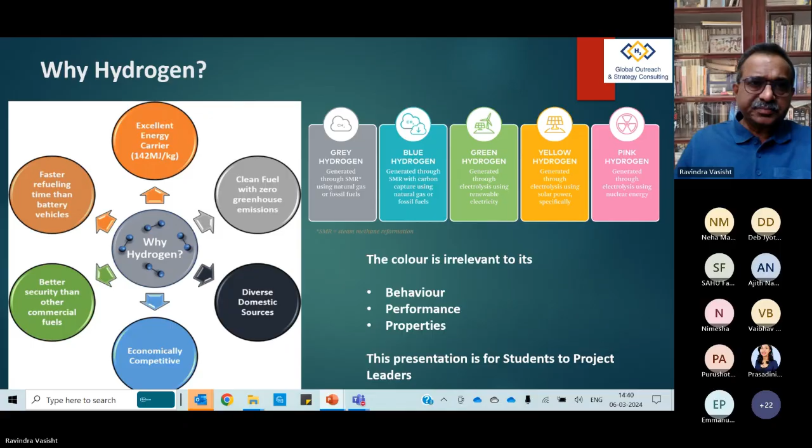To give a very slight historical background and key info about this, hydrogen is not something that is new. It's been there since the 17th century. So we are literally talking about more than 4 centuries since its knowledge and usage in the industry for various scientific activities.

It exists in abundance, as I said. The key is that it requires power to produce, which means one needs to look at an energy versus power balance for this. And compared to other definitions, one key definition which especially the Americans have followed is whether there's any carbon produced in the process of producing hydrogen.

And I think India is also probably including that as a part of the definition. Which means that it is not just solar or wind or hydropower that comes in as a renewable energy, but nuclear also can be an input source which can change the entire dynamics of this particular industry.

Safety is a very key important factor, especially when handling this. And above all, one needs to understand that hydrogen is an industry that is happening simultaneously across the globe. Whether it is a smaller country or a large developed country, both of them are talking of hydrogen at the same time.

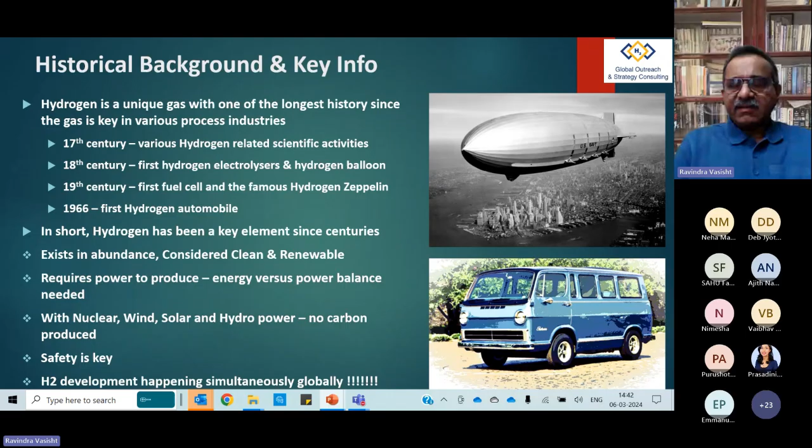Unlike earlier, where one would wait, like India would wait for a while before something is proved and understood in, let's say, US and Europe and such places. So India would have the benefit of the learning from others. But this time, including India, everyone is talking of hydrogen at the same time.

So as I was mentioning earlier, when you look at the energy content and when you look at diesel, which is somewhere around 45.3, you have hydrogen at 142, which is almost 3 times that of diesel in terms of the energy that it gives you.

But on the other hand, when you look at the density, which is what is important for storage, you will find that the graph is exactly a mirror image, where you can store diesel in very large quantities in a given space, whereas hydrogen is hardly 5% or less than 5% of what diesel could do for you. So which means that you have a very wide bandwidth of what the gas can do. And that is where the first contrarian behavior of hydrogen and its challenges start.

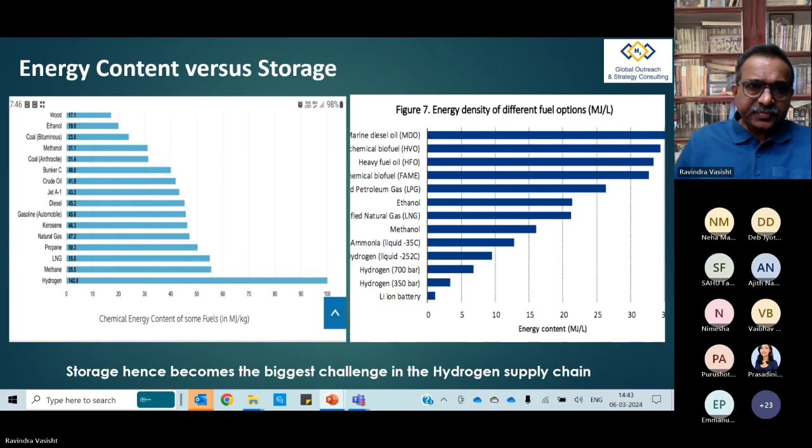After a long time, I debated and then decided I would jump to something which I wanted to have in the end. And I'll tell you the reason why.

Now, when you look at the various standards in India, or for that matter in the world, it is an extremely important factor when you're doing anything in the hydrogen sphere. What you find is that globally these standards are evolving, they are changing and they're improving. As a consequence, along with things like periodic retesting and other certifications, there are various other minor points which add to the complexity and cost of what a nation outside of the US and Europe ends up doing in hydrogen.

One of the factors is, for example, when you take the mobility application, whether it's a train, bus, truck or car, you have different standards, and the design factor for these is between 2.25 to 2.5, or actually 2.4 to be more precise. But when it comes to storage and transportation, apart from the fact that some standards have 2.25 to 2.5, there are others where the design factor is 3.

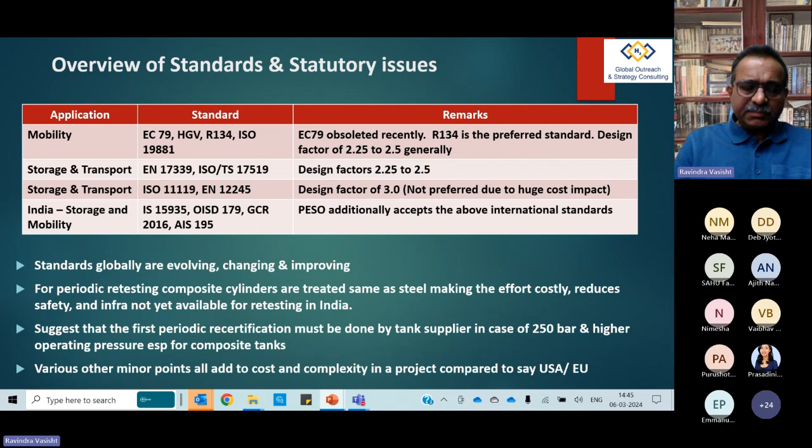Now let's look at the way the industry is working currently. When you look at the mobility sector, meaning transportation whether by train, bus, truck or whatever, normally they use either a 350 bar or 700 bar storage tank currently, and these tanks are designed with a safety factor of between 2.25 to 2.4. When it comes to storage and transportation, these vary from as low as 200 bar right up to 950 bar, and the design safety factors vary between 2.25 up to 3.

So where do these things make a difference? Suppose one were looking at a composite cylinder, and I'll come to composite cylinders in a minute, and you're using carbon fiber, then a safety factor as low as 2.36 is allowed. Whereas you can also make the same cylinder using glass fiber, where the requirement of safety is 3.

Now, what exactly does this mean? It means that if you have an operating pressure of 250 bar, then your design pressure would be either 590 bar or 750 bar, depending on what safety factor you need to follow based on the standards you take. As I mentioned in the previous slide, there are certain standards which demand a safety factor of 3, where even for carbon fiber they make it mandatory to have a safety factor of 3. So if you take an operating pressure of 350, you need to go up to as much as 1050 bar. And for a 500 bar cylinder, you need to design it for actually 1500 bar.

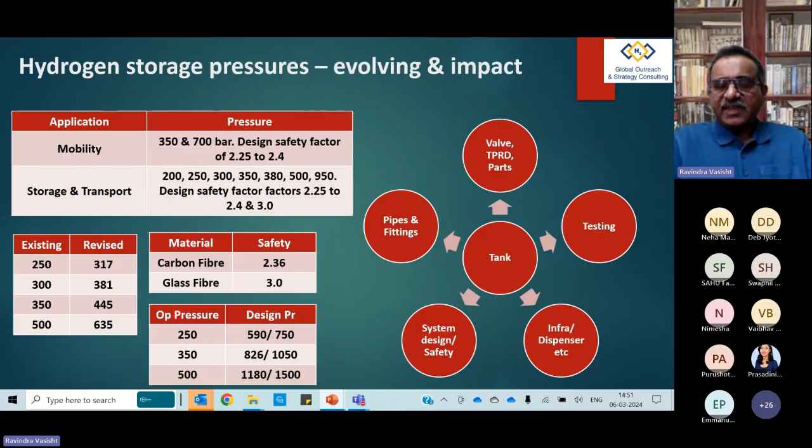Now when you look at applications, these are some of the broad applications you have. If you take a Toyota Mirai car, it operated at 700 bar with 3 cylinders. You have buses and trucks which run at 350 or 700, and trains.

And when you need to transport hydrogen, you can have a hydrogen train, as you could see at the bottom left-hand side. And when you look at the inside of it, what you see on the right side is how you would look at it.

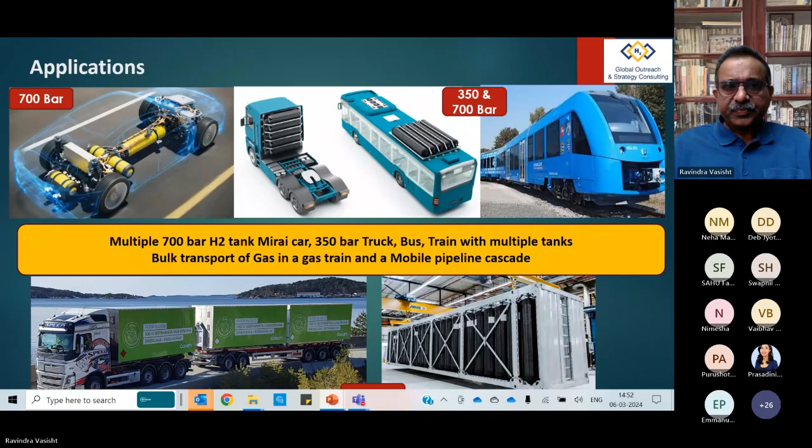So now let's look at the hydrogen delivery chain, what exactly happens. You have an electrolyzer where hydrogen is produced at maybe around less than 30 bar. Then you have a compressor which will compress it to either maybe 200, 350, or 500, or it could be liquid hydrogen, and you store it because you need to store the hydrogen you produce.

Assuming you're using the hydrogen in the same location, you would again reduce the pressure back and use it either in a fuel cell or in a process, where again the pressure requirement is less than around 20 bar normally.

Now suppose you decide to transport the gas from the production site to a consumption site, you would compress it to around 250 or 500 bar, take it in a truck, and at the location where you're going to use it, again reduce the pressure and then use it.

On the other hand, you could have a situation where you need to fill it up into a truck or a bus, which means that because the pressure reduces, you need to again compress it, take it into a dispenser, and then dispense it into a truck or a bus.

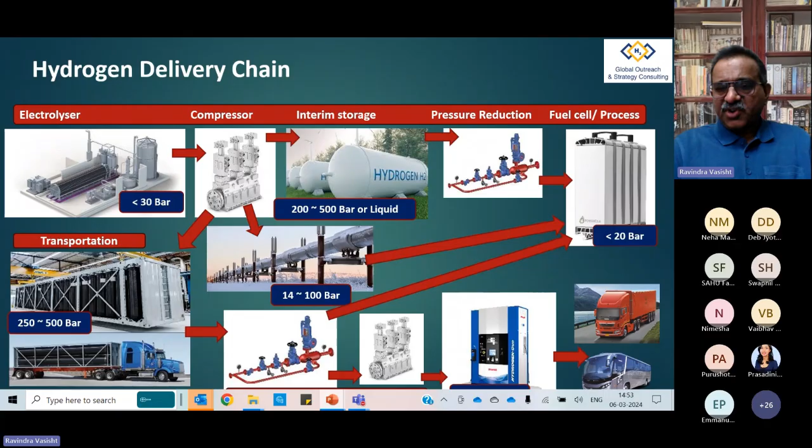Now what is the implication of this? It's the energy chain. In the energy chain, you have energy to produce hydrogen, then you use energy to compress the hydrogen, then you need energy to maintain that storage depending upon whatever storage you're going to use, and then you're going to use that energy in the process.

On the other hand, after compression, you might again expend energy to transport the hydrogen, and then at the delivery location, you will have energy to maintain the storage, and then you will need energy to dispense the hydrogen, which could be used either in automobiles or in a process.

And then if you are delivering it to a vehicle, the pressure reduces, which means you again need energy to compress the hydrogen and take it back. So the entire chain uses a significant amount of energy. The lesson from this is that it is important to map the energy chain across the whole chain so that you can balance the energy and not have a situation where you are spending more energy but generating or utilizing it with lesser benefits.

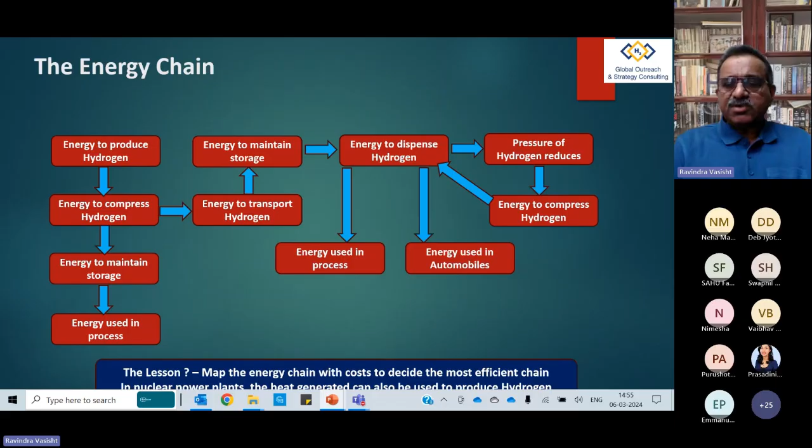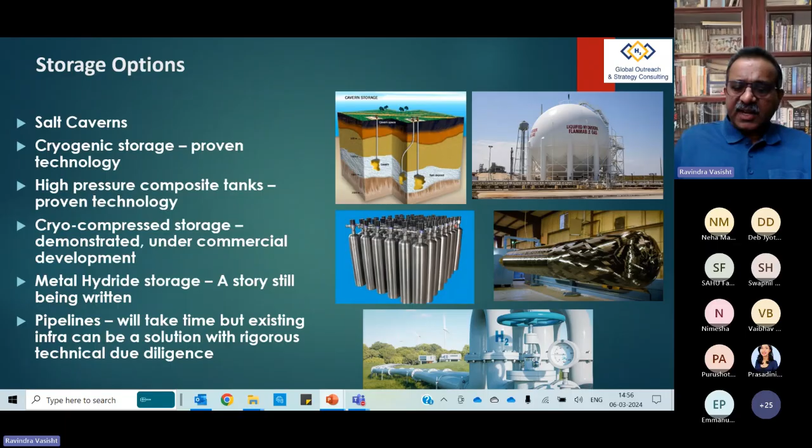So let's come to salt caverns. Salt caverns are essentially an artificial cavity created in a geological salt deposit, which is deep underground. You drill into that location, pump in water to dissolve the salt located deep underground, remove that, and then create space as you can see in these photographs. And then you push hydrogen into these caverns so that it is stored in large quantities, as much as around 200 bar, because you have dug deep into the ground and you automatically get that pressure containment.

These have normally been used where there is an existing pipeline and where they want a fallback in an emergency when they need to repair the pipeline or some such reason. So this is where it is being used. And while these are safe and long lasting, in the entire world right now there are just about 4 such locations. So availability of such a location is important for you to be able to even use this kind of a solution.

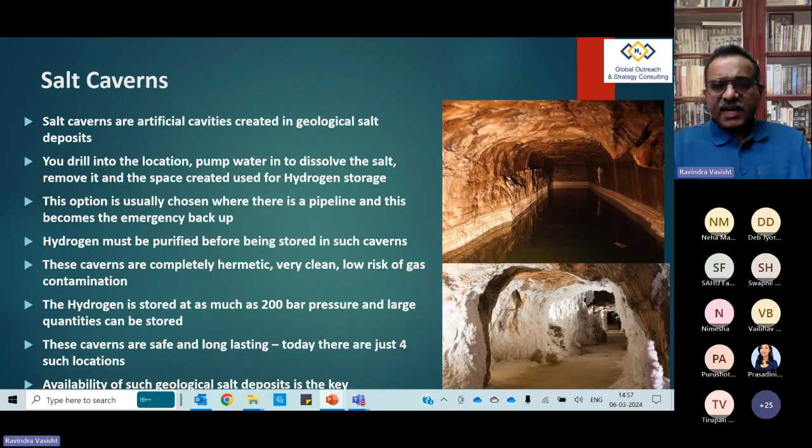Now let's come to cryogenic storage. This is again proven technology, where the hydrogen is stored in liquid form. This technology is already being used globally in quite a few places. Now, when you look at the different gases currently used in the field in liquid form, natural gas is at about minus 161 degrees centigrade, nitrogen at minus 196, and hydrogen is actually at minus 253.

So you can imagine the level of cryogenic temperature you need to reach to convert it into liquid and then store it by maintaining that temperature. So today, when you look at LNG globally, you do not see it very popularly in commercial applications like on a truck or a bus, even though there are a large number of them on the road. But when you compare it to CNG, compressed natural gas, these are probably hardly a few percentage compared to the compressed natural gas form.

Whereas LNG is essentially used for bulk shipping, to take LNG from the Gulf to the US, or maybe somewhere in the Gulf to India. Now, the energy required to liquefy is anywhere between 12 to 15 kilowatt hours per kg. So the total energy for liquefaction and to maintain it is pretty high, which means the economies of scale required for such a project is very high. Globally, from what I've understood from people, current storage capability is around 5 to 10 tons per day around the world.

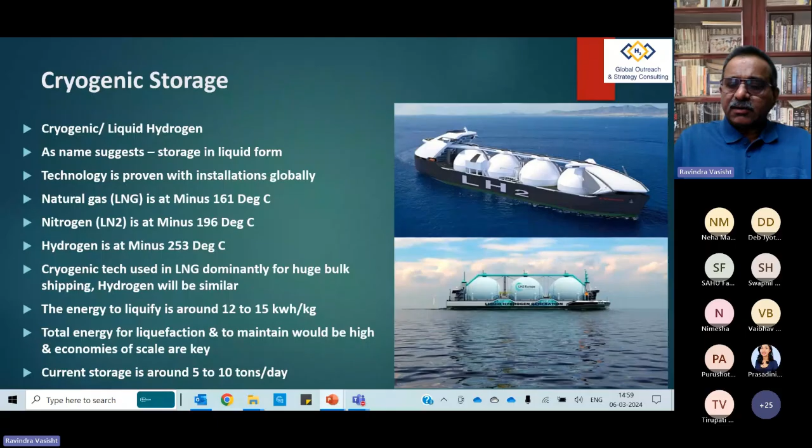Now, the other place where you would have heard about cryogenic liquid hydrogen, but without the word hydrogen being used, is the cryogenic rocket engine, which is what you would have read about every time ISRO launches a satellite using the GSLV rocket. These are all cryogenic rockets where hydrogen is stored at minus 253 degrees centigrade. It is mixed with oxygen, and then you get an extremely high thrust, something that no other fuel available and known to man can provide, which is the reason why they use this.

Now, this entire system is extremely complex, and the thermal and structural challenges for storing it at that kind of temperature are very high. So the safety factor and the safety systems and culture required are significantly higher compared to any other gas and any other normal systems we follow today.

Very interestingly, this particular technology is not only proven, but it is even manufactured in India. But yet, very few people, or nobody, really uses it because of the complexity, the cost, and the scale required. For example, someone like NASA has a tank of about 5,000 cubic meters. Now, they are talking of going up to 20,000 and 40,000, but do they have it as yet? No, they don't. So this particular technology is predominantly used in the aerospace and defense segment. So when you start looking at it at a commercial level, it has a whole host of challenges, which I will come to towards the end of my presentation.

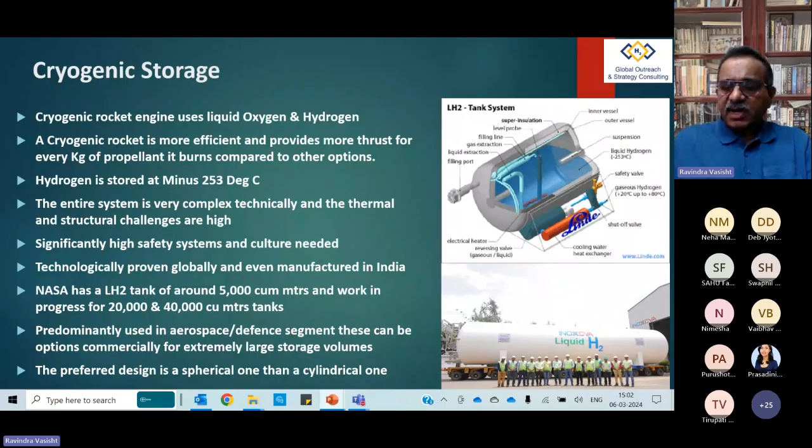Now, the third kind of storage is metal hydride. Essentially, there are certain metals and alloys which are capable of reversibly absorbing and releasing hydrogen. So when you want to store hydrogen, there is heat released and it absorbs the hydrogen into itself. And then when you want to use the hydrogen, there is heat that is absorbed and the hydrogen is released for you to use as a gas.

There are materials like lithium hydride and sodium borohydride and so on, which have been used. But then the IP is in these kinds of materials and the way the systems are designed. The biggest advantage here is that you can get significantly high storage efficiency at a very low pressure.

Now, this technology is yet to go commercial. It is still at a lab level application, as I would call it. We really do not have information about the costs and the supply chain issues. And the entire system has a number of unstable challenges, because of which the US, for example, which is probably the benchmark in the world for safety systems, has suggested many safety safeguards for its usage. But does this storage system sound exciting? The answer is yes.

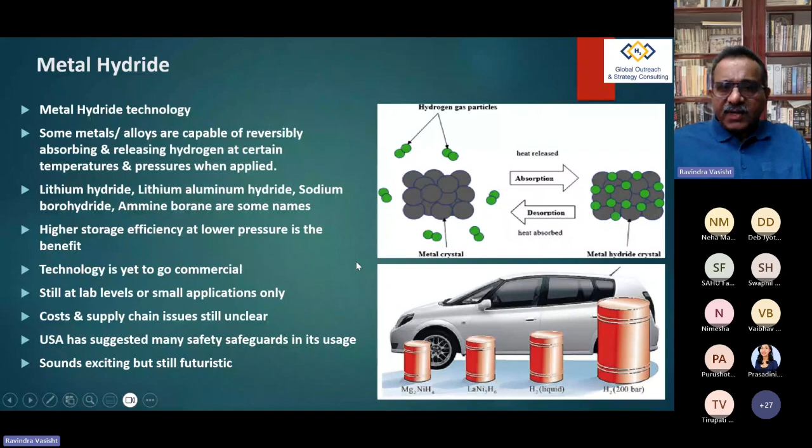So when you look at, for example, in a car, if you were wanting to use metal hydride or hydride kind of storage, the size of a tank would be, depending upon the material you're using, like what you see in the first and second ones here. If you were to use liquid hydrogen in the same car, this is the third one. But if you were to use hydrogen as a compressed gas, as much as 200 bar, as low as 200 bar, this is how large the tank would be compared to the size of a car.

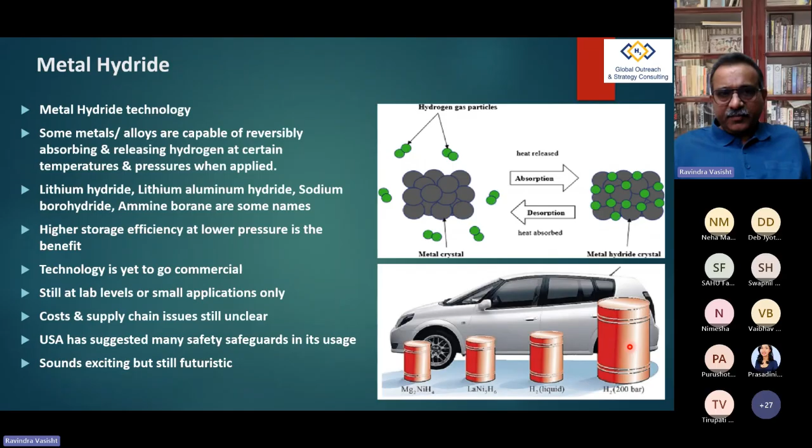But yet, 100% of the cars in the world today use compressed hydrogen gas and not any other form of hydrogen. Now, the next technology, which has been demonstrated but is expected to be commercially available by 2025 hopefully, is a hybrid technology where cryogenic temperatures and high pressures are combined, where the gas is cooled and stored at 400 bar pressure.

Again, composite cylinders are used, but these composite cylinders are designed to be able to handle cryogenic temperatures. Now, the technology, as claimed by way of the demonstration, can have 40% higher volume compared to a 700 bar system available in the world today. And the station cost, meaning a dispensing station where you would refill your truck or bus with hydrogen, is supposed to be 25% of setting up a 700 bar system in terms of total cost of ownership.

Now, when you look at what this can do, a truck can have something like 100 kgs of hydrogen storage with one of these kinds of systems you see. The one on the top right with 4 tanks will probably have 25 kgs each, giving you about 100 kgs total. The one on the top left will give you around 50 kgs, and the one on the bottom, for transporting hydrogen from point A to point B, could carry as much as 2,500 kgs of hydrogen. Today, a truck is not able to carry more than around 30, 33 kgs of hydrogen at 350 bar.

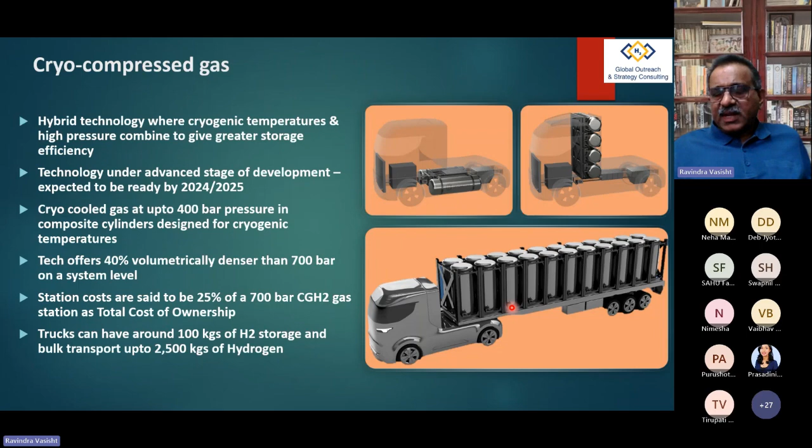And maybe around 50, 52, 55 kgs of hydrogen at 700 bar. And when you look at bulk transportation, even at 500 bar, you are not able to carry more than around 1.1 tons of hydrogen today.

So the storage solution today, that I would call 99% used across the world, is high pressure storage using composites. So I'm going to spend a lot more time talking about this particular kind of storage.

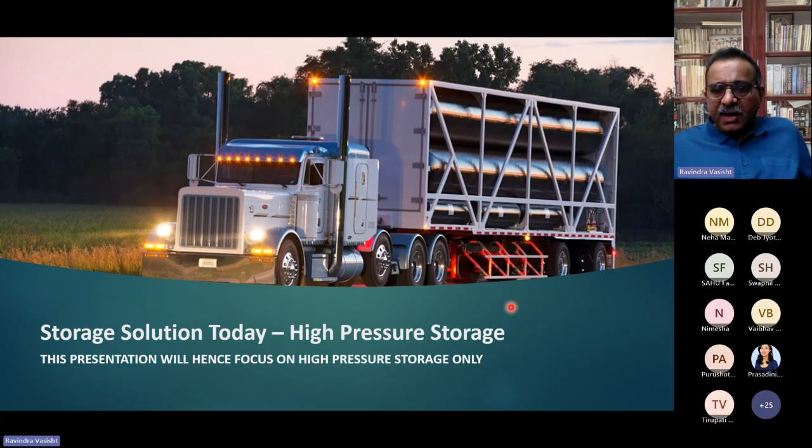Now, there are different kinds of cylinders available in the world today, classified as type 1, 2, 3, and 4. Type 1 is essentially what we all know, a steel cylinder. Type 2 is an intermediate solution, a technology that came in to try to reduce the weight of the steel cylinder, but nobody in the world really uses it, and the only place you can possibly see it is probably China. Otherwise, nobody in the world would touch it. The third is type 3, a carbon composite cylinder with an aluminum liner, and type 4, which is again a carbon composite, but with a plastic liner.

So I will come to this in a minute now.

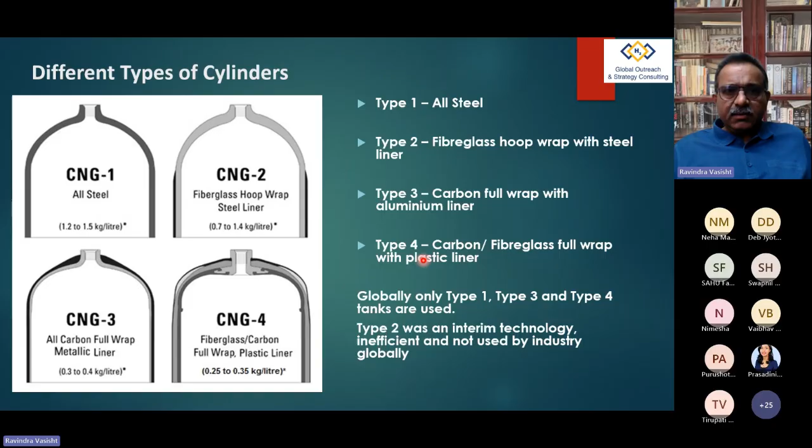So when you look at steel cylinders, what are the problems? One, they're extremely heavy. They are the oldest, and they very easily corrode and rust. Especially if you're in a coastal area, or a country like Sri Lanka which has a very large coastline where almost every city is adjacent to the sea, these cylinders corrode so quickly that in the Gulf area, for example, I've seen these cylinders get replaced every 5 years, because that's how quickly it corrodes and becomes unsafe for usage.

Now, when you talk about hydrogen, you have a significant problem of metal embrittlement, where as the pressure increases, the hydrogen starts weakening the steel cylinder itself, making it embrittled, where it can easily give way and create a safety problem for you.

So today, including in India, nobody uses a steel cylinder for more than around 170 to 200 bar storage pressure. There are special grades that can be used for up to 500 bar. They have been proven, they are in the market, but they are quite expensive.

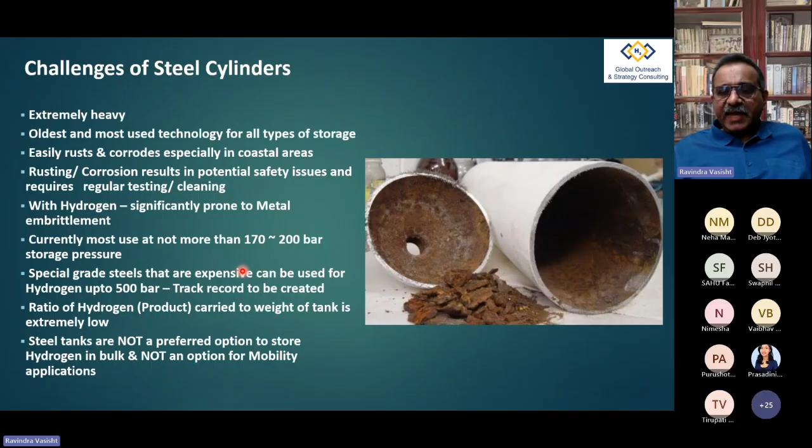And because these tanks are so heavy, the amount of product carried is insignificantly low. So today, as we speak, steel tanks are not an option at all to store hydrogen by anybody, especially in bulk, and especially in mobility applications on any kind of vehicle. So the option that people use is composites. Now, with composites, you can actually go all the way up to 950 bar storage pressure.

This technology has its roots and foundation in the defense and aerospace segment, which uses carbon fiber.

It would be technically possible today that a 250 bar system may be more cost effective than a 500 bar system. When you start looking at the system cost, the compressor and the composite tank for a 500 bar system could have the compressor almost 3 times more expensive than a 250 bar, and the 500 bar tank would be more than 2 times expensive as a 250 bar system. So we need to find out the optimum cost by factoring in the cost of compression and doing a system cost analysis.

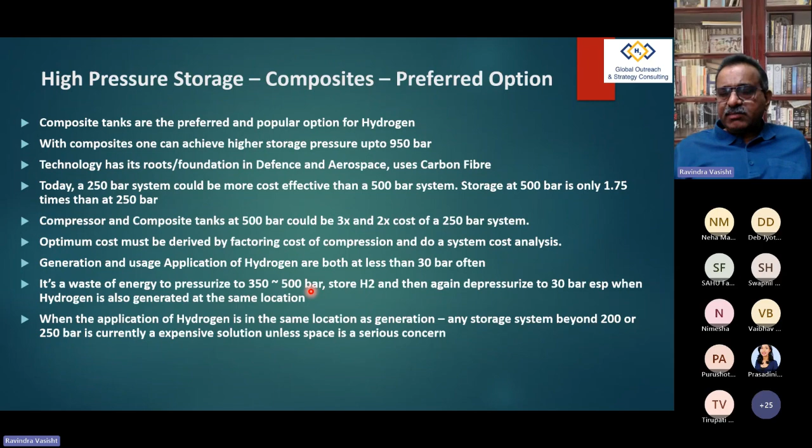As I said earlier, the generation and usage application of hydrogen, when it is less than 30 bar in a particular location, it is an absolute waste of energy to pressurize it to 350 or 500 and then depressurize it again to 30 bar, especially if it's in the same place. So if it is at the same location, as we speak today, a 250 bar or 200 bar storage could be probably more cost effective than any other solution.

So how does a composite tank look? A Type 3 or Type 4, as it is called, is the preferred choice for hydrogen storage applications, as also even for CNG. A Type 3 composite tank has an inner layer of aluminium, while a Type 4 composite tank has an inner layer of plastic. Up to 350 bar operating pressure, whether it is Type 3 or Type 4, globally it does not matter. Both are equally good and acceptable, and nobody would get into a debate between Type 3 and Type 4 when using it up to 350 bar operating pressure. A user must then focus only on price, delivery, service, and whether a particular size tank is available to suit their application, and that has to be the focus.

Now, when you start going beyond 350 bar and hitting 700 bar, especially for onboard applications, today a Type 4 cylinder is preferred because, to the best of my knowledge, a Type 3 is not available beyond around 450 bar. So a Type 4 is essentially preferred when using it at higher pressures. Going forward, composites are the only solution for hydrogen, at least in the next 5 to 10 years at the minimum. So, do not dilute the argument by getting into which technology between Type 3 and Type 4 — anything you go for would be equally good and acceptable.

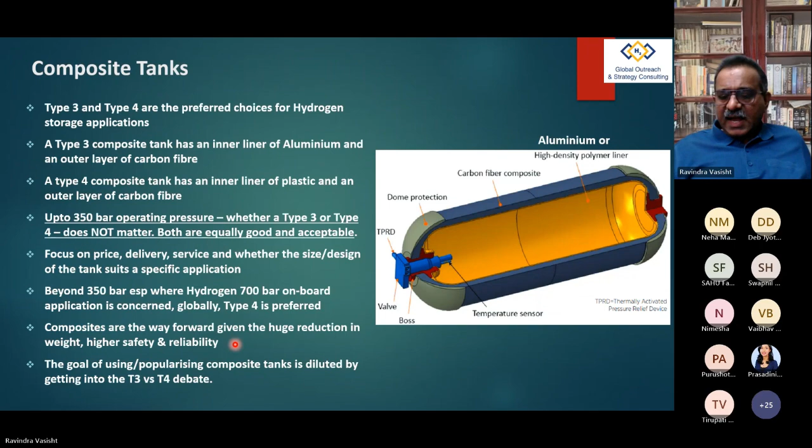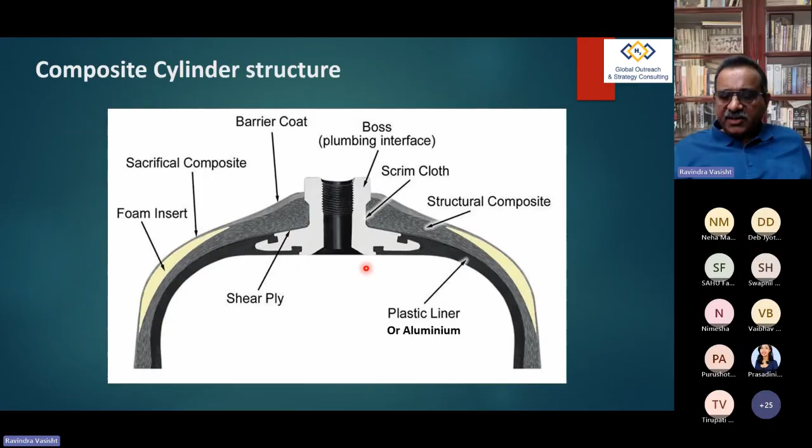So how does the structure essentially look? To give you a very basic understanding, you have a plastic or an aluminum liner, and then you have the carbon fiber wound around it. Then you have what's called an outer sacrificial layer, which gives it certain mechanical strength in case you suddenly drop it or accidentally hit it. Normally when this is being wound, the carbon fiber is wound in such a way that where the valve is fixed is completely hermetically sealed, so there cannot be any leakage in those joints. So the manufacturing process is like this.

When you take a Type 4 cylinder, for example, you have a long plastic pipe, which could be, let's say, 6 meters long. You can cut it to whatever length you want. Then you have these white portions on either side, which are injection molded domes, welded to either end, creating a cylindrical shape. In the case of aluminium, you would have an aluminium cylinder completely of this shape, since you're able to form aluminium into this kind of shape.

The main reason why Type 4 came in compared to Type 3 is that, for example, you take this pipe which is 6 meters long. Let's say you have a cylinder that is 3.5 meters long, and somebody tells you they don't want to change the diameter but want a cylinder that is 3.8 meters long instead. You just cut the pipe at whatever point you want, making it 3.8, do the same welding, and then you have a tank literally within 24 to 48 hours. So the speed of development with a Type 4 tank is very, very high, which is why Type 4 became fairly popular, especially where larger size tanks were being used.

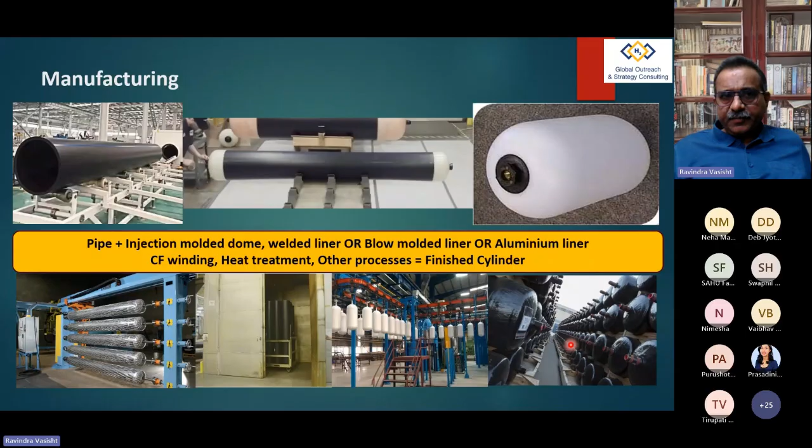So the benefits of a composite storage system: you have a 70% weight reduction compared to steel, which means a 100 kg steel cylinder, the equivalent of that in composite would weigh only 30 kgs. So you have two benefits that come from there.

One, you could, on a system, let's say a truck or a bus, technically speaking, have 3 cylinders of the same size instead of one for the same weight as steel, getting longer range or a larger quantity of gas that you would carry. Or if you're using just one, the 70% weight reduction results in fuel efficiency and lower carbon emissions. You have these kinds of benefits that come in.

There is zero corrosion. In a composite cylinder, there would be no corrosion because of any impurities that might be in the gas. It has a long fatigue life and very high impact strength. It is absolutely safe, and it meets standards that are more than those of steel in some cases.

This has been tested for a 30 year life cycle. It is assured for 20 years because that is what currently the statutory regulations allow. And these cylinders have been used at least since 1963, to the best of my knowledge, which means we are talking of more than 60 years of track record of composite cylinders in the market.

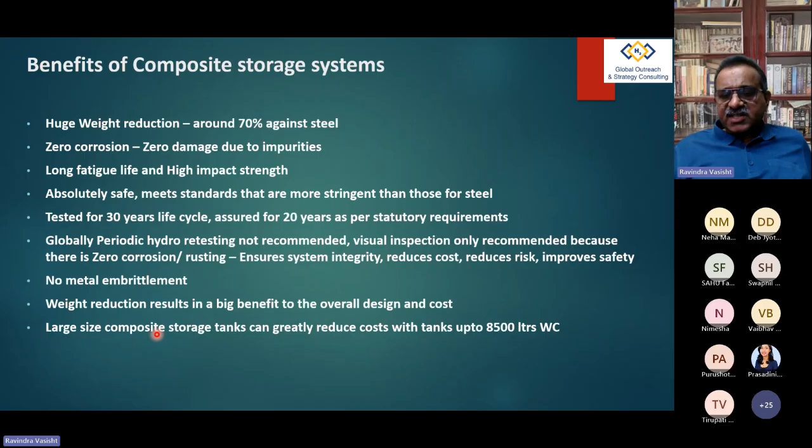So especially when you talk of type 4, you can go in for very, very large tanks of as large as 8,500 liters water capacity.

Now, to give you an idea of the next challenge when it comes to hydrogen, including in terms of storage, let us talk of 3,000 kgs of hydrogen to be stored. I've taken 3,000 kgs because of a particular customer requirement in India.

Now you could store it at 250 bar, 300 bar, 350, 450, 500. There are different manufacturers who offer different kinds of tanks. So I've done a kind of dipstick study with different tanks.

The first thing you must understand is at 250 bar, let's say you have a fill efficiency of 1, which means whatever you're storing is at 250 bar pressure. When you go to 300 bar, your pressure ratio increases to 1.2, and your fill efficiency is still at 1.2. But when you hit 350, while your pressure ratio has gone up by 1.4, meaning 250 to 350 increases 1.4, the amount of hydrogen you can store is only 1.3 times more.

With 450, it's 1.6. With 500, when the pressure ratio is doubled, one would normally assume you should have twice the amount of storage in the same tank. But you have only 1.7 times, which means the fill efficiency reduces in the case of hydrogen. So you have a challenge when you're talking of using different pressures.

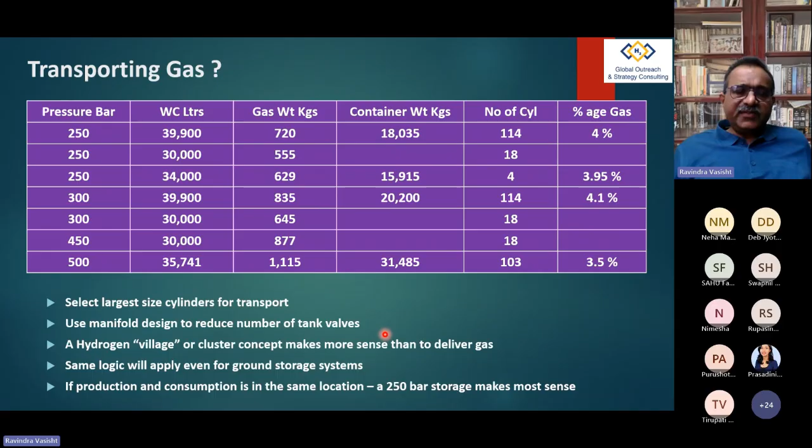And again, as I mentioned earlier, if production and consumption are in the same location, go for a lower pressure, at least as of today. If the prices change tomorrow, you can definitely go up to a higher pressure, which makes logical sense.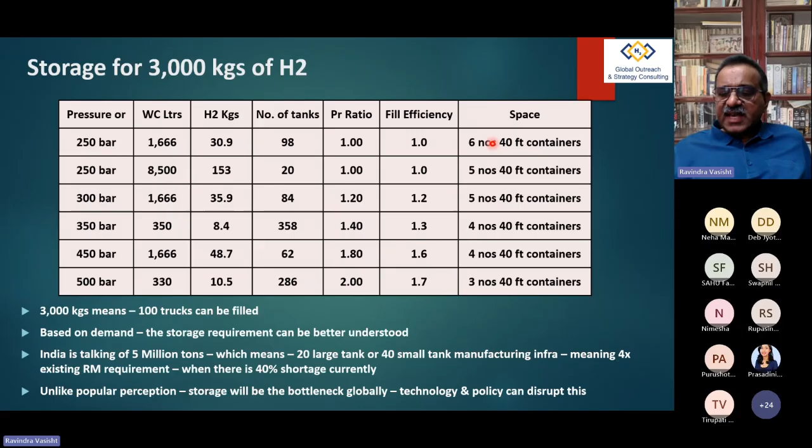In one such system, as I mentioned previously, you have anywhere between 3 to 6 numbers of 40 feet containers which have to move on a daily basis between two locations for you to be able to cater to just 100 trucks. So you can now start multiplying the number of trucks or buses that one is planning for, and then see how many trucks and containers will have to move to cater to their requirement of fuel.

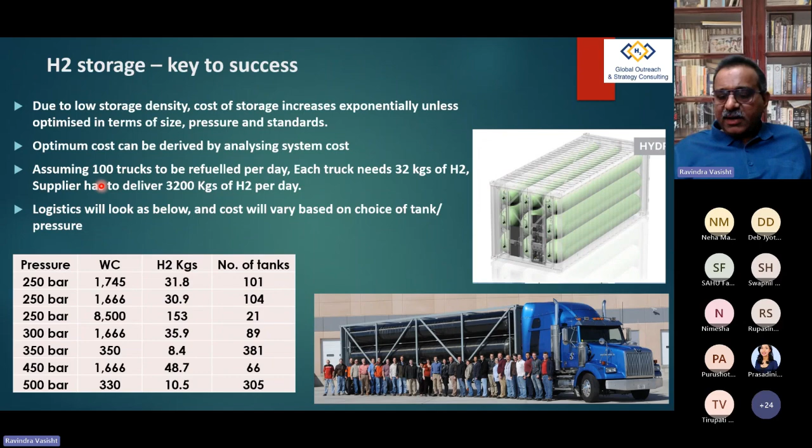So to sum up the hydrogen supply logistics, as I would recommend to anybody today, is that if you are producing hydrogen and utilizing it in the same location, look at an onsite storage of about 200 to 250 bar.

And then if you are dispensing it to vehicles, then you can have what I call distributed storage between 200 and 500 bar, so that your overall cost reduces and you have only a few cylinders at 500 bar. You use it by way of a differential pressure, and as the pressure reduces, you can keep using other cylinders of lower capacity, so that your overall storage cost reduces significantly.

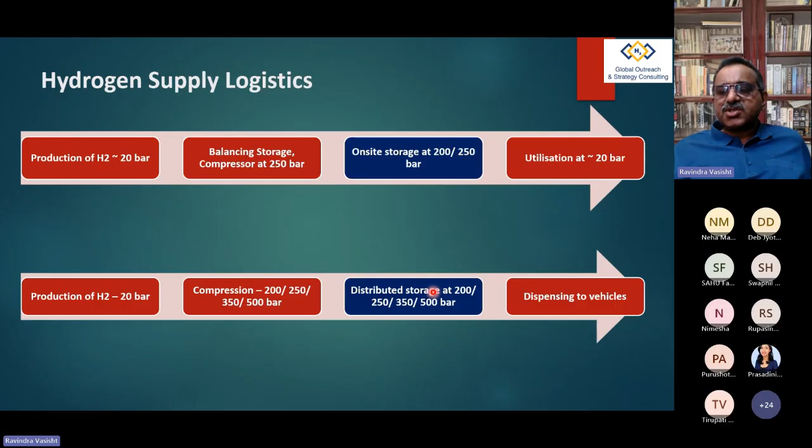Now, in the beginning of my presentation, I mentioned I would talk about some challenges. Let's take liquid hydrogen, for example. The entire technology, the sale, everything is driven by the defense and aerospace industry and companies like NASA or ISRO. Even an ISRO will not say 'I want it cheap,' because they cannot afford a 500 or 600 crore rocket and satellite to not work. Which means they drive what is required.

Very often, as happens in the defense industry especially, technologies then become commercial. So today there might be a technology that NASA or the European Space Agency is using, but that technology may not have been allowed by the governments to be given out commercially. So we don't know what we don't know in this factor. We only know what has been offered to us by a supplier who says 'I have a technology for liquid hydrogen,' and we accept that.

Now, there are huge product development costs, which means that while a NASA or ISRO would pay whatever money might be required, for a commercial enterprise that may not be possible. And then you have the cost of complexity, as I call it, because you need to handle this. So this entire technology being driven by defense and aerospace has all these kinds of challenges.

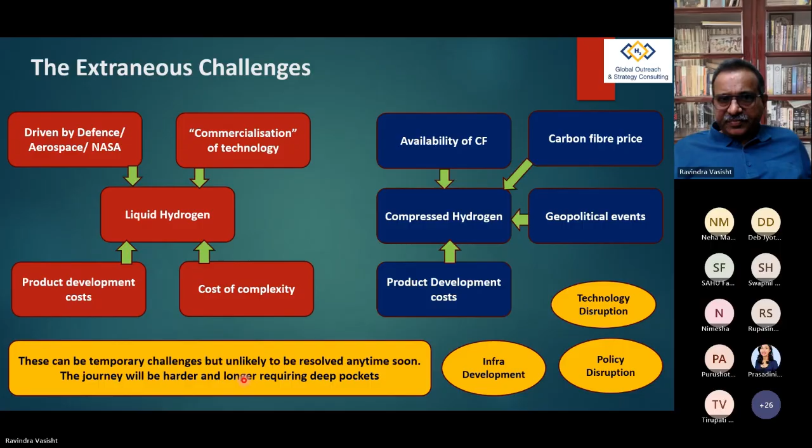Now, this is an opinion by a technology CEO in Europe. I would leave it to you to read this, but there is a lesson in this opinion where he says Europe developed the fuel cell technology in 1838 and 1839. That's how old the technology is. But today, at Toyota and others, it's the Chinese market that drives everything. So the consequences are that Europe, in spite of having the technology for so many years, has not leveraged it as compared to China. That's just because of the kind of money that's been poured in.

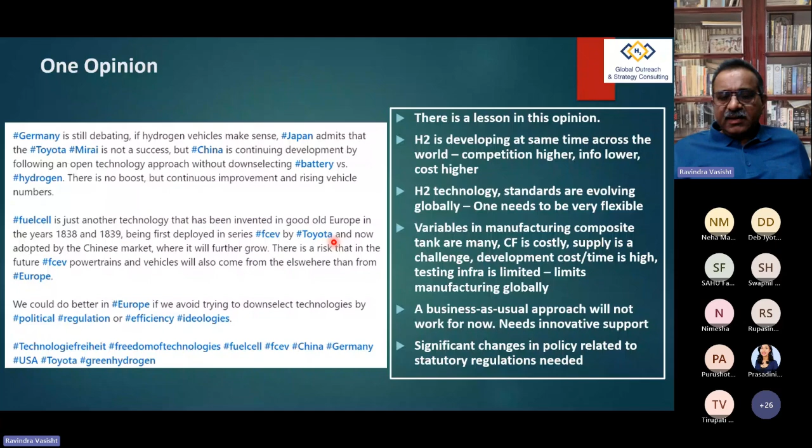So here, as a kind of closure to this particular presentation, hydrogen is developing at the same time. Technology and standards are evolving, so one needs to be very, very flexible. The variables in the manufacturing are very many, so this limits the availability and the manufacturing capabilities. The business as usual approach will not work for now. One needs to have innovative support systems from the government as well as industry, and a lot of significant changes in policy would probably be required in order to promote and get this growing faster than what we are currently doing.

And this brings me to the last couple of slides, which is the key factor of safety. Like I said, this is the lightest element known to mankind. So when you see, even gasoline or LPG is far more denser as compared to hydrogen or air, and this can very easily escape into the atmosphere. But the problem is it can ignite at very, very low concentrations, which means that if there's an oxygen percentage anywhere between 3 to 75%, it can ignite. Whereas others would probably ignite at maybe 15%, 20% concentration of oxygen, which may not be possible in all situations. So the problem with hydrogen is it can ignite at very, very low concentrations.

Second, when hydrogen catches fire, you cannot see it by the naked eye. So if you suspect that there is a leak, one must assume that there is a fire and a flame and accordingly react to that particular situation. So with hydrogen, safety becomes the key factor because of the overall complexity.

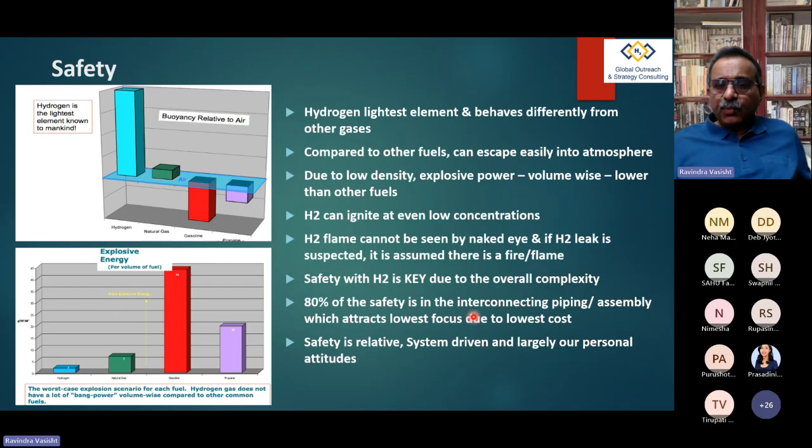And as I've written in one of my articles, 80% of the safety is in the interconnecting piping and assemblies and so on, which attracts the lowest focus by any customer because they focus on what costs the maximum, like your compressor or the tank or dispenser or whatever. Whereas those have a very, very low risk of safety, but the maximum safety risk is in the rest of the small 20% cost, and that one needs to focus upon.

So when you're trying to look at safety, the important thing before you start a hydrogen project, which is key, is you need to ask, what do you want to protect? Because let us say there is something that is 10 kilometers away, you may feel that even if there's an explosion, I don't need to protect it. But on the other hand, there is something 1 kilometer away and you feel that that is very, very important, then you would need to probably decide that you need to protect that against some untoward incident happening, which means that you want to understand what would be the impact of an explosion over a distance.

So before you actually start a project, it is important to do this kind of a study wherein you say, okay, I'm going to have 1000 kgs of hydrogen, 3000 kgs of hydrogen, or whatever, and what happens if there is an explosion. And then accordingly decide what you're going to do. You need to understand what can create an explosion and then work on that basis. Then, as I said, you can create weak spots to direct the explosion. Just as water flows to the lowest point always, you can have a situation where, for example, when you look at on the right side, middle picture, that's a container.

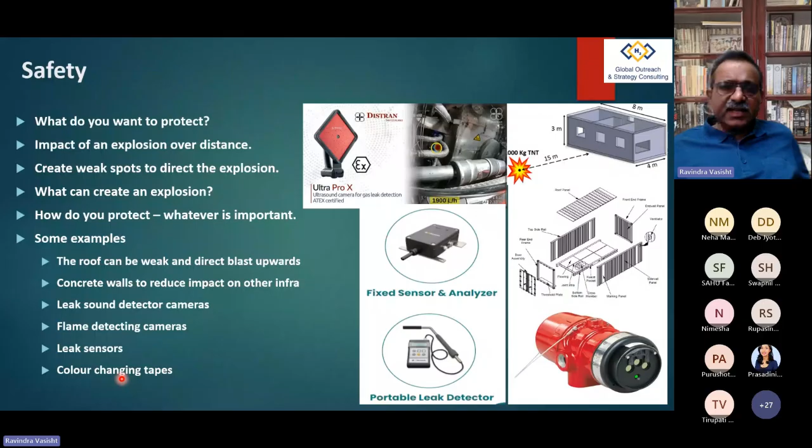So depending upon what you're protecting and how you're protecting, you could have a roof that is weak, you could have a concrete wall that could reduce impact, and you could have various different kinds of cameras and sensors. You get a tape that you can wind around every joint where the tape color changes if there's a leak. So you have various different options in running a plant.

So to sum up, as I mentioned, with 80% of the risk in the piping, we need to focus on that. And most important is, before you start the project, getting a safety and risk analysis done where gas dispersion, explosion, and simulations of the fire are very important.

Now, very often what happens is a customer thinks, oh, this costs $500,000, it costs $250,000, we can't invest this kind of money every time. No, you don't have to do that. It is important that you do it once in the beginning for a particular project.

Let's say the government of a country can get this study done with a certain assumption, and then the results from that study could give more than 80% of the education required when designing similar systems elsewhere. This means this investment on doing the complete safety and risk analysis can be amortized over 5 to 10 projects, where each project would then be probably just a 20 to $30,000 kind of expense, which is something that's easily affordable.

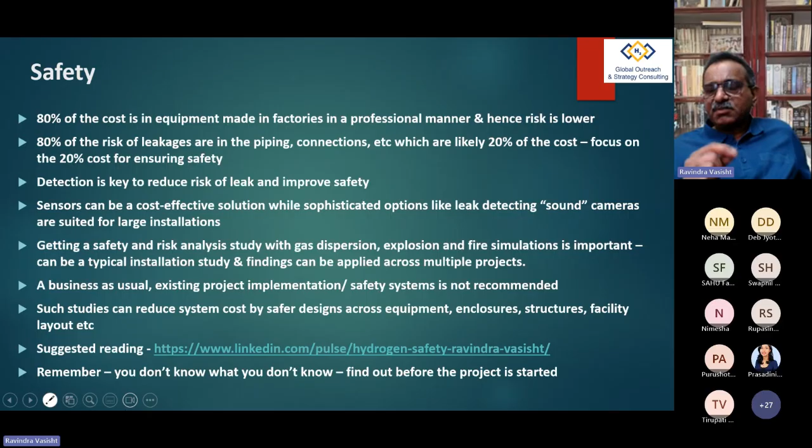And last but not least, most important, I keep telling in the case of hydrogen is, as we speak today in 2024, we don't know what we don't know. And we need to do a significant amount of due diligence to find out what it is that we don't know, so that the risk and the success of our project becomes much higher in terms of the way we execute it.